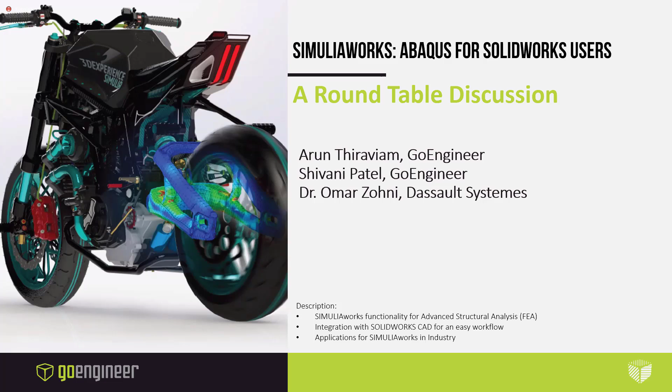Arun, if you could post up that first poll question, I was curious on whether you guys are using any of these simulation tools when you're doing your own testing, or if you have some other methods that you're using when you test your own products. Excellent, very cool. It'd be interesting to hear what other would be for some of you, maybe later, and what products you're currently doing the various testing in. This is really useful information. Thank you for participating. Do you mind posting up the second poll as well?

With 71% of you guys doing finite element analysis, I'm curious on if you're using any of the products I have on my screen.

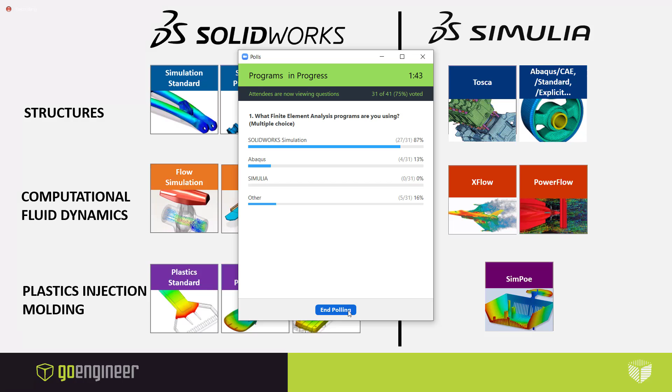So while you were talking, we had a question come in. Is ABAQUS the solver engine behind the SOLIDWORKS FEA simulation tool? It's a good question. So ABAQUS, I can take. Yeah, go ahead. So ABAQUS is not the solver in the SOLIDWORKS desktop program.

It is being developed now by the ABAQUS Solver team. So many years ago, I think this is the order that it happened: SOLIDWORKS acquired Cosmos, which was an old finite element analysis solver out of USC here in Southern California. And then after that acquisition, I believe Dassault then acquired SOLIDWORKS. And I'm not sure, maybe Dassault acquired SOLIDWORKS first and then they acquired Cosmos, but that's basically the solver that's inside of SOLIDWORKS Desktop.

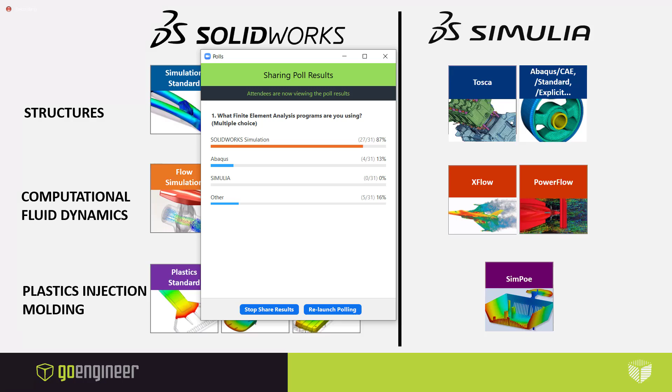That being said, some of the new capabilities that you're seeing, like the way we handle contacts inside of SOLIDWORKS, the topology optimization, those are products developed by Simulia and the ABAQUS team. Actually, the topology stuff is by the Tosca team. So you're getting a good merging of the two solvers right now, but the underlying solver inside of SOLIDWORKS Desktop is still the old Cosmos solver.

Thank you. That's perfect.

I do. We have a lot of SOLIDWORKS simulation users, which makes sense. These are our GoEngineer family. So I'm still seeing your screen, Shivani. I'm not sure if I'm supposed to be seeing something else, but no, I'm not seeing it. Okay, perfect. Yeah, I'm not seeing the polls.

Good stuff. So we got 87% of people using SOLIDWORKS simulation. Pretty wide range. That's a good number for sure. We didn't see any on the Simulia side, which is interesting. Some ABAQUS, some doing other simulation products. That's some good numbers.

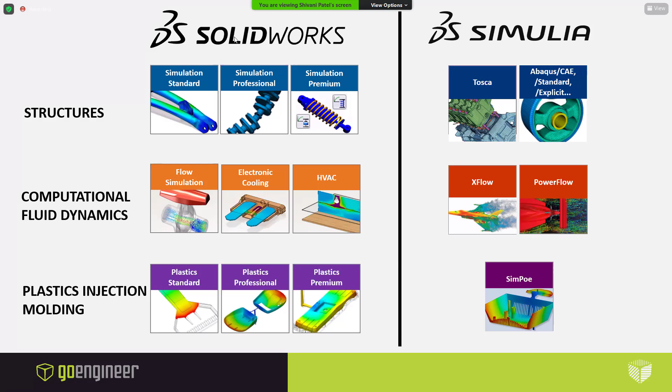Knowing that, what this presentation is really about is the bridge between our SOLIDWORKS simulation tool and the Simulia tool. This is called SIMULIAworks. Again, a brand name covering the bridge between these two products. It is hosted on the 3D Experience platform, and it takes the ease of use, the intuitiveness of many of our SOLIDWORKS products, what really makes it so popular, but then it combines that with the physics and the really industry standard computational power of many of the Simulia applications.

On top of this, it's still part of the SOLIDWORKS workflow, where the big thing about SOLIDWORKS simulation, what makes it so awesome, is you make a little design change in SOLIDWORKS, it immediately is there in simulation, and you rerun your test and you have your answer. It's great for iterative testing, fantastic for those during the design process to be able to run these finite element analyses. So that is still possible with SIMULIAworks.

We were able to push our design changes and our CAD data from SOLIDWORKS into the tool, making it very iterative.

I see something else come in. I saw a question come in. Will Simulia have the explicit solver aspect of ABAQUS? Yes, absolutely. ABAQUS is part of the Simulia brand, so yes, it does have that explicit solver as part of it, and SIMULIAworks does as well. It is using the exact same solver. It is the ABAQUS solver.

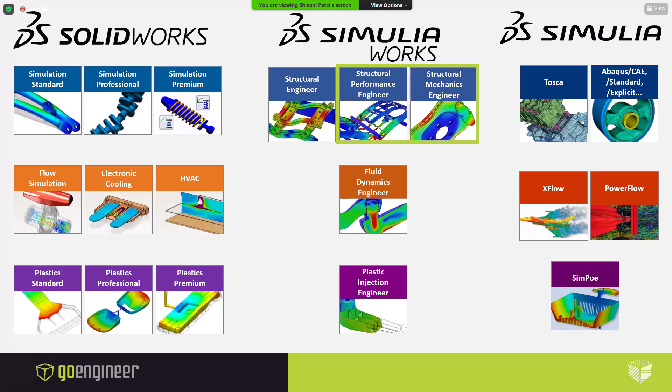Yep. And if you guys are wondering what tabs are, we'll be showing that later. Yeah, we're going to show you guys some tabs.

Okay, I've got about 5 to 7 main technology highlights. I'm not showing the software right now, so this will be very broad. I'm going to give an overview. Trying to get some screens moved around.

Okay, our first main one is general contact. You guys have been using SolidWorks simulation, so you are aware that if I had to apply something like this inside of SolidWorks Sim, I would be selecting each one of these circular holes and applying a no penetration contact, right?

It can be very time consuming. With this general contact method here in SIMULIAworks, it's really just one click. It's one tool that we apply contact for entire part files or entire assemblies. Like I said, really just one or two clicks, so the time savings are fantastic.

But more importantly, we're using ABAQUS's general contact, which is making those component interactions incredibly realistic. Where this part deformed and buckled was very unpredictable, and to be able to accurately represent how this part would react in torsion was fantastic. So that is our first main technology highlight, this general contact ability for parts or assemblies.

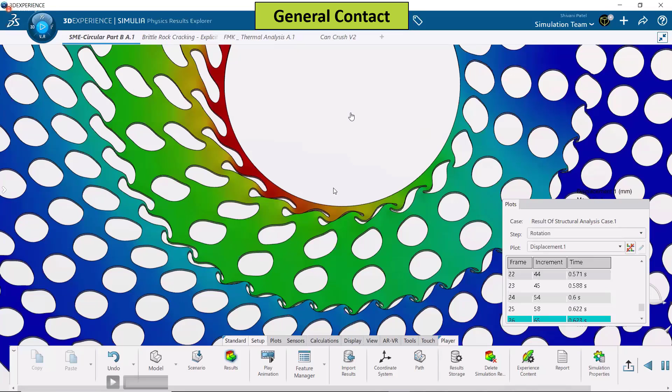Shivani, to draw parallels with SolidWorks simulation, that'll be almost like a global no penetration, right? But way more intelligent. Yeah, because global no penetration, as many of you have dealt with, only works for faces that are initially touching or currently colliding. We would have had to do these individually in contact sets. Very cool point. All right, that's our general contact.

Let's take a look at our next one. It is about complex materials. This example is going to be on a structure colliding with a rock wall. This is like a bump in that rock wall. And watch as I click through these moments in time, you're seeing more and more elements disappear or get deleted.

This is called element deletion. With enough strain, stress, or deformation, it's up to us - these elements will get deleted, and it's a fantastic way to represent something like this where a rock is shattering, to predict how this material is going to react.

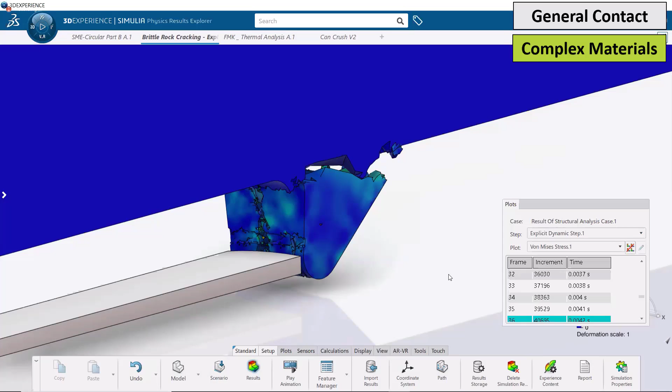Now that's just one complex material, right? And honestly, we aren't able to predict how a rock wall shatters unless we have a material that can handle that. So I'm going to go ahead and show you the larger database that we have available here inside of ABAQUS, or inside of SIMULIAworks.

Let's try to remember, what is the limitation, or how far can SOLIDWORKS simulation go with materials? Off the top of my head, that's about 3 hyperelastic materials, or theories that we can apply. We have elastic plastic materials. We have 1 viscoelastic type.

Here I've selected a hyperelastic material, and just take a look at how many theories are available to us here. The more theories we have, the more accurately we can represent many different kinds of materials. As we know, you don't get an accurate result unless you're applying the correct material to your part file, and all the various other behaviors that material could undergo—things that change with rate or with creep, or that cyclically change. We're able to apply these kinds of complex material behaviors.

Now, saying how important that is, it can be very daunting seeing this list of possible materials and saying, how am I going to apply my SOLIDWORKS stuff in here, or my lab testing material data?

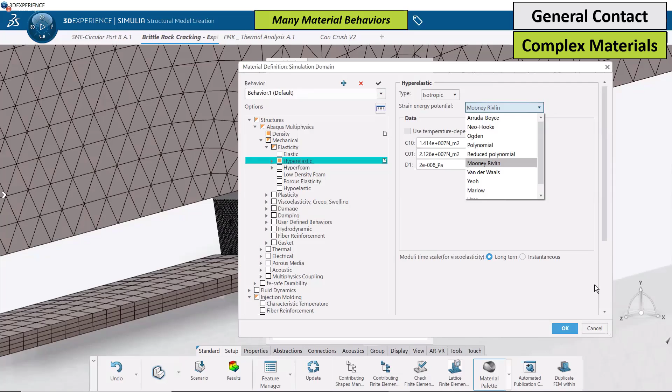So with this material calibration, we're able to very accurately represent our materials and apply them inside that database very easily.

Let me just show a few of the clicks of what that would look like. It's really not that long. It starts with using this particular material application that comes with the program. We import our data—this is Excel data, CSV data, just a few columns inside of Excel. Here you'll see us do some data manipulation, so you can delete data points, you can shift this curve around as needed. You don't have to do a lot of the data modification in Excel; you can make those changes live here.

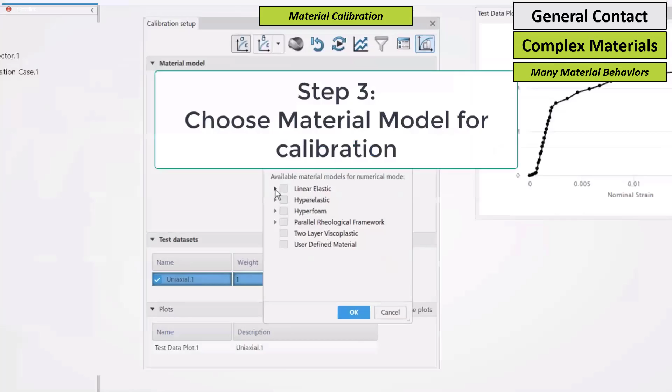Next, we're making a guess on what kind of material property this would follow. We're going to guess elastic plastic first, and that's going to give us some material values here on the left-hand side—elastic modulus, some other stuff there. We've clicked the button called Execute, and it modifies various material properties until we get a curve that matches our data. It's really 3 or 4 clicks, but we're able to get this very accurate material data curve that we can now apply to our part files.

Good stuff, so that's kind of a summary of our material capabilities. What I really like about this, besides the whole host of material properties you can apply, is that you can save this directly into a database without even exiting your simulation session. Once you've done the calibration, you're ready to go—you can essentially plug this curve in and start running your analysis, all within the same efficient application. I like that, just streamlined. Good stuff.

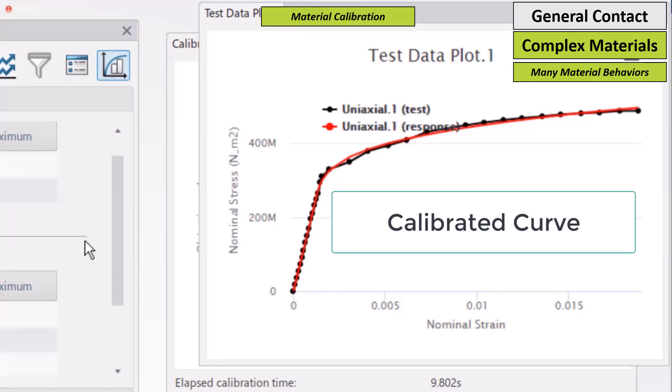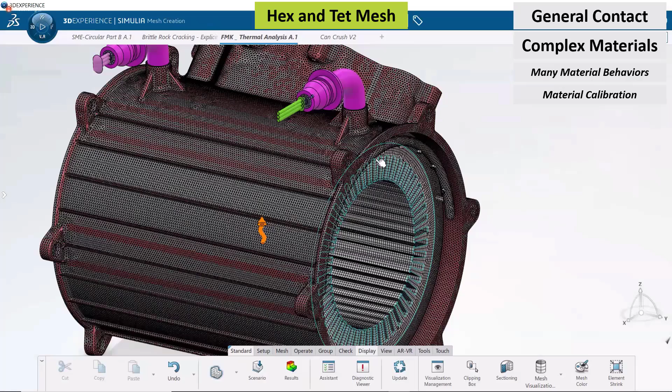Let's get a little bit into meshing, because that's a big thing. What do we have in SOLIDWORKS? We have tetrahedral elements—here I'm going to show you a thermal analysis. Let me pop over to a mesh type; you're going to see hex elements as well, our brick-shaped elements. Check out that part on the inside—those are all cube-looking rectangular prisms, so we have the hex mesh type. We, of course, also have shells and beam type elements.

And then if we take a look on the inside of this model, we can of course refine the mesh. There are some automatic refining capabilities around curves and holes. We can do this boundary type material refinement—check out how the prisms get thinner near the walls of that fluid. This is a flow simulation setup; that fluid is better captured because we're able to automatically refine the mesh around the walls of the part, or the fluid in this case.

You mentioned a key point—I was about to ask, this doesn't look like a structural thermal analysis. Yeah, there's some weird part going through the center of everything. So what kind of analysis is this, CFD or FEA? This is CFD, and you're going to notice some interfaces similar to what Arun's going to show. The meshing capability isn't different from one to the other; it's the same meshing capability, I just happen to have used it in the CFD tool in this case. That looks awesome—it's very nice how the mesh gets a lot finer as it goes towards the wall.

Absolutely, captures a lot of that geometry - boundary layer effects and so on and so forth.

So we had someone ask a question. Omar, I'm going to direct this one at you. Besides just meshing it here in this program, can we import meshes from regular ABAQUS or Simulia or other programs and bring it into this tool?

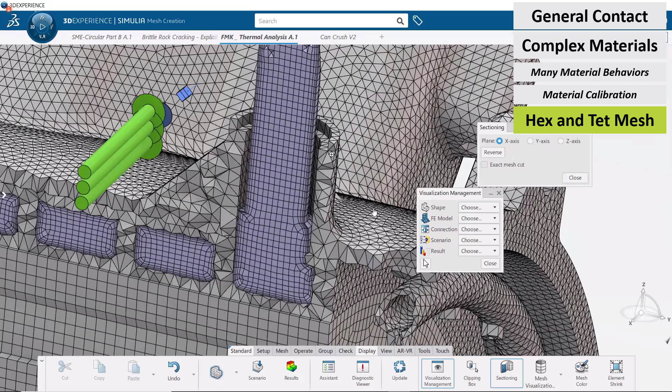So we've got explicit dynamics - this is the explicit solver. This could be dynamic capabilities or crash testing. Let's go take a look at that. We've got some crash testing or drop testing - this is impact testing, really anything happening on a small scale of time.

Yeah, any of those extreme kind of buckling or crumpling scenarios where a general nonlinear solver, an implicit nonlinear solver, wouldn't be able to capture this small range of time or the material behaviors that happen over those microscales. So with the explicit dynamics tool, we're able to go much further beyond the deformation scales available in SOLIDWORKS into these very complex realms.

Jonathan asked, which solver would I need to perform a crash test involving a fluid-filled shell? With a crash test, we would definitely need the explicit dynamics tool. The level of crumpling and buckling going on there, and that interaction between the two parts, would require that explicit tool. I'll show an example of this.

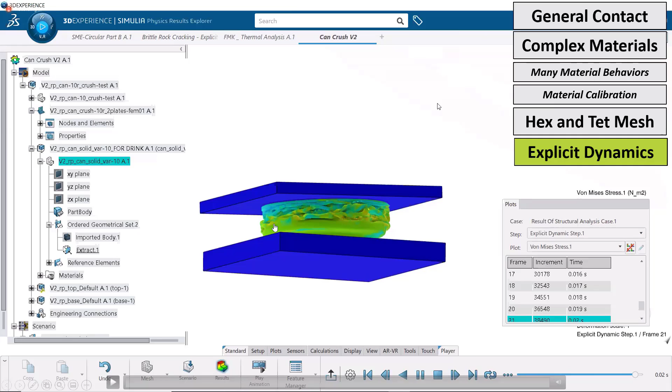Okay, good. So a huge range of functionality there. With the ability to run these complex analyses, you might be thinking, how long did that take to solve? That looks really complex. Fortunately, the can was very simple, and this took maybe 15 minutes. But if it was a very complex solution, I could be worried about that.

Fortunately, we have the ability to run things locally on our computers, but also on the cloud, using cloud computers. With the program, you can run it on 4 cores on your local computer, but with a little bit of an extra purchase, you can get access to tokens or credits like I have here to use those cloud-based cores.

Now, this is an explicit solver, meaning the more cores that we are applying to this solution, the faster it solves with no diminishing returns. So you can get huge time savings running with these cloud cores.

Omar, do you have any comments on that? No, I mean, I think you highlighted it great.

So the way it works is if you purchase cloud, out of the box you can run on 4 cores, although that's going to be increased to 8, I believe, later this year or early next year, so you'll be able to run 8 cores locally. If you have cloud computing credits and a small model, less than 1 million nodes, it will run on 18 cores; 1 million to 4 million nodes, 36 cores; and over 4 million nodes, it'll run on 144 cores in a virtual machine.

There's a little bit of time it takes to set up the virtual machine, but like Shivani pointed out, your return based on the runtime should be very, very linear. So if it took 16 hours on 1 core, it will take 1 hour on 16 cores. I love it, great numbers.

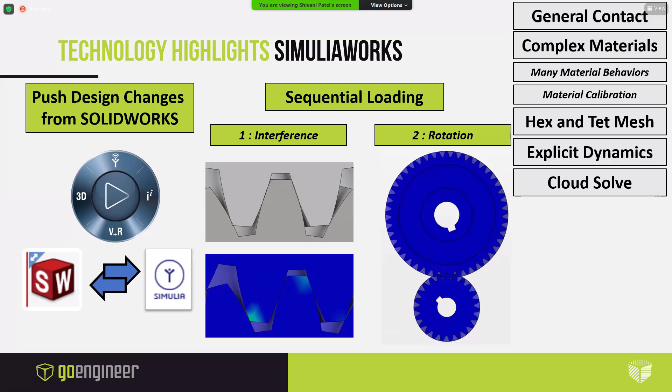I did, we had a question come in: is there a different license to run on more than 8 cores locally? It's not really a license, you just have to buy cloud computing credits. It's the same interface. Yes, exactly.

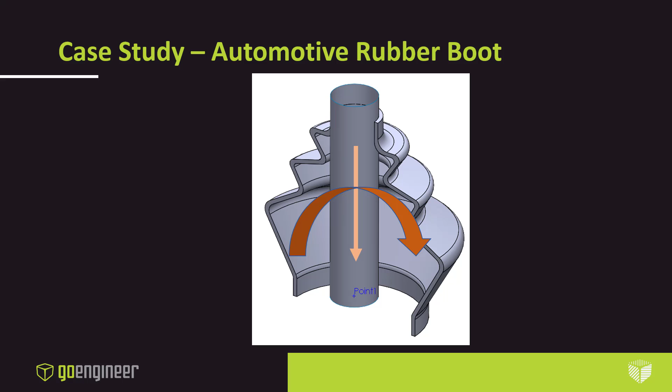So I have this automotive rubber boot—you find these in CV joints of automobiles. It's a rubber component that experiences a lot of stress and strain because it's on rotating components mostly. I thought it would be an interesting case to simulate with SIMULIAworks because I'm able to essentially stack loading conditions: compress this component, and also apply a torsional load that follows the compression, which is pretty easy to set up in terms of workflow, and it gives you some really cool looking results.

For starters, you essentially start off with SolidWorks. You maintain the connection with the 3D Experience platform through the 3D Experience connector. As soon as you open a model in SolidWorks, it shows up on the connector, and all you need to do is save it. When you hit the save button, there are two copies that are essentially saved, one on your local folder for you to make manipulations, and another on the cloud on the 3D Experience platform.

Now, you'll essentially be setting up the simulation on the cloud version of this component. As soon as the save is complete and the software converts it into a format that the 3D Experience can read, you're able to launch a simulation application right from within SolidWorks.

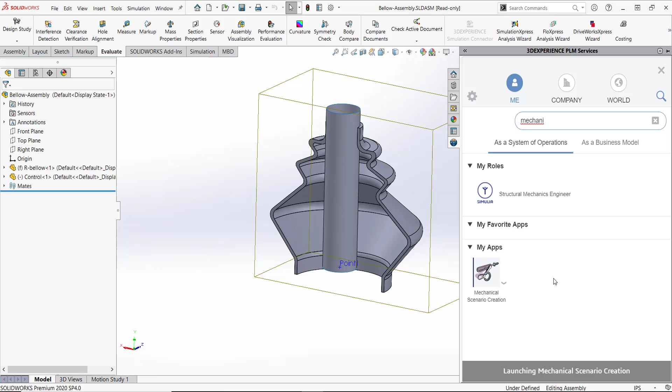So like Shivani said before, there are two applications. The mechanical scenario application is ABAQUS explicit. You'll just know that it has explicit and ABAQUS standard capabilities. So we have two levels: ABAQUS standard and explicit. Mechanical scenario is explicit.

Now you'll notice that I've launched another application, and the models automatically open into this application, and I'll be primarily running a structural analysis. So I select the structural analysis type, and boom, you're in the simulation environment. And just know this model is still connected to the SolidWorks model. So what I'll be showcasing is I'll be making a change and pushing that change through the simulation environment.

Now jumping into the simulation environment, I just want to show you the SolidWorks connector, and this is the model open in the simulation environment. And immediately you'll see the UI. It might seem a little familiar—you have the spec tree, as we like to call it, which is similar to the feature tree in SolidWorks.

And if many of you have used the simulation wizard in SolidWorks, we have something called the assistant panel, which is very similar to the simulation wizard. So essentially you follow the simulation wizard to set up your analysis and make sure that all of these stages are assigned. Simulations can sometimes get complex, especially if you're running crash testing for complex materials, and this is a really handy way of keeping track of the analysis setup.

Now, this taught me the interface, actually, the assistant. Yep, that's where I learned where everything was, and then I got crazier after that. But this was my teacher.

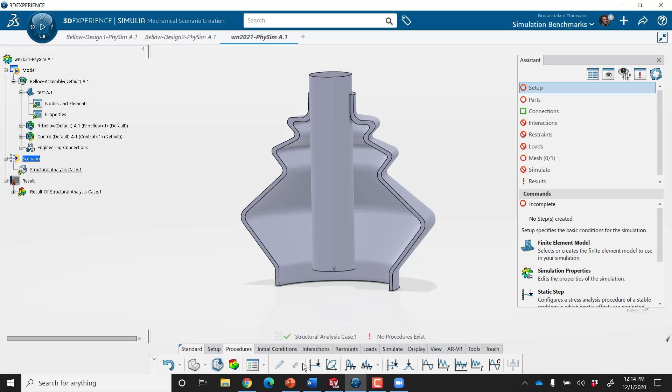And when it comes to the setup, you have access to all the procedures, all the analysis types right here. So essentially, you see the red circle in the setup indicating that you haven't specified what kind of analysis you're trying to run. You can essentially interact with the action bar to set up the various analysis types.

So if I wanted to set up a nonlinear analysis, I can just grab the static step, give this a name, and specify the appropriate time step settings, and keep moving forward. As soon as I complete that, you'll notice there's a green check mark in the setup, so it gives you a lot of feedback. I'd also say I basically use the assistant panel to teach myself the software, and it's helped me be very successful with it.

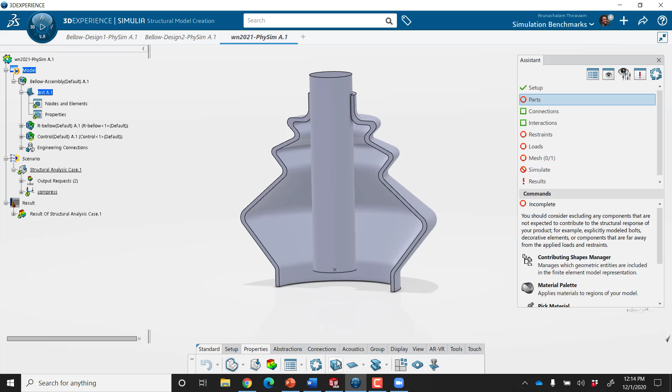But what I'd really like to show you is the meshing aspect of this entire thing. For the next stage of the setup, I'm able to assign section properties to each of these components. This answers the question we had earlier about whether mixed meshing is possible—and yes, it is. You have access to all the section types right here based on what kind of model you have. So here, this is a solid bellow, but the control arm is essentially a shell, so I'll be applying different section properties to each of these.

So I'll go in and select the component, and I'm able to assign the material directly here. Once I hit the magnifying glass, I have access to the material database, and I'm able to search it. I'm trying to apply a silicone 60 material that I already had keyed in, so it shows up right off the bat. But if I clear the search, you'll see my entire database. This was a custom material I created using the material calibration app—I had the material testing curves that I was able to convert to coefficients.

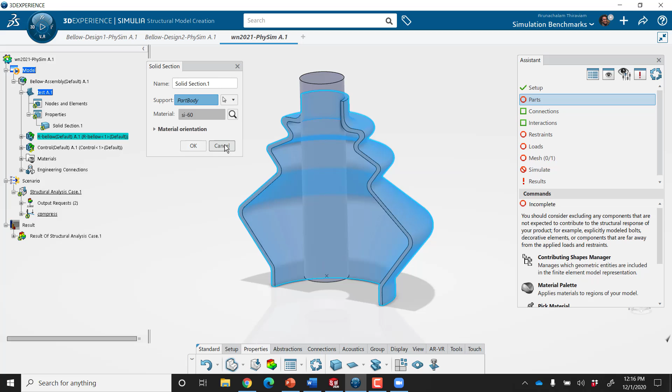Now once the solid section's been assigned, I'd like to show you the spec tree for a second. Just like SolidWorks, anything you do to the analysis in terms of setup essentially shows up as a history in the SolidWorks model and in the spec tree. So once I set up the solid section property, you can see it shows up as an item on the tree. If I want to modify it, I can just double click it and have access to it. That way you have multiple levels of feedback to make sure you're setting the analysis correctly as you set up these analyses.

Now I did mention I'm able to apply shell section properties to the control arm, so I'd like to show you that really quick. I just grab the section property, select the component, and specify the thickness. You can manipulate whether this is the mid surface, the top surface, or the bottom surface, giving a lot of flexibility. I won't assign the material here because I'd like to show you the feedback mechanism in the software—it's pretty great.

You'll see there's a yellow exclamation mark next to the shell section indicating that you've assigned the section, but you probably missed out the property. That's fine, I'm just demonstrating the workflow, so I'm going to move on.

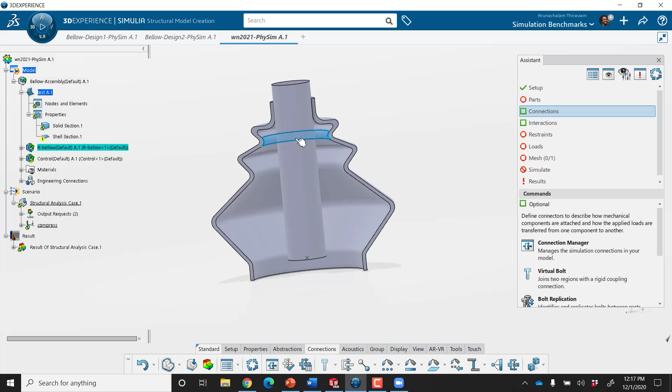Another really nice aspect of the software is that it keeps track of your geometry for your boundary condition and connection applications. This is especially beneficial when defining tie or bonded contacts. You can specify the surfaces that are bonded together, typically the bellow surface and the control arm, or use the tie detection tool to find all the touching faces, or specify a clearance between faces to identify them as bonded contacts.

You have a list of all the ties that have been recognized for you to pick and choose from - this big tie buffet. I think that's a really cool feature, especially if you're dealing with a 20-30 component model where most of them are bonded or welded together. It's a handy feature to specify either contacting components or clearance between components meant to be tied together.

Before you get too much further, we had a question come in. Will many of these ABAQUS capabilities get imported or incorporated into SOLIDWORKS simulation, like the material calibrator?

This is interesting, I see Omar unmuting himself, I'll comment right before he does. They combined the R&D teams between ABAQUS and SOLIDWORKS simulation, so we're already seeing capabilities come in. If you check out our What's New videos from the past 1 or 2 years, the physics improving inside SOLIDWORKS simulation is all coming from ABAQUS. But Omar, any more specifics you wanted to add?

Yeah, I was going to say the same thing. There's been a collaboration between the development efforts on the desktop and the ABAQUS side - it's all being developed by the Simulia development team. I'd probably say you're not going to see the material calibration app or the explicit solver ever turned on in the desktop. The 3D Experience platform and the roles and apps available there are the future for DS. That's not to say you won't continue to see development, bug fixes, and streamlining to the desktop SOLIDWORKS simulation tools, but probably the new stuff will remain on the platform.

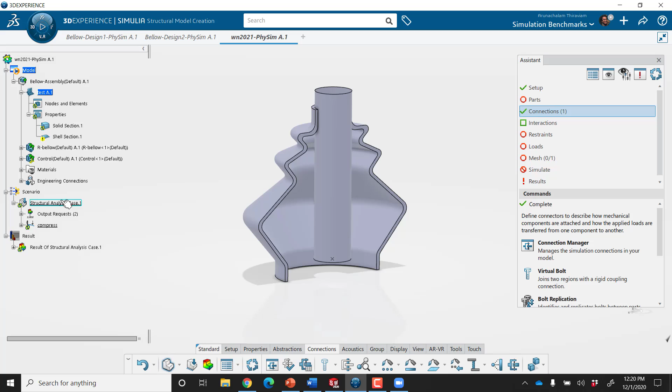So where was I? Oh yeah, okay, we were talking about the tie contacts. I really love pointing out this tree because having such a complex analysis software give you feedback on all the complexities you've dialed in is a super nice aspect. You see the tie contact here again - if you want more detail, get in and look at all the faces that have been defined, make sure you define how the source and target surfaces interact, and so on.

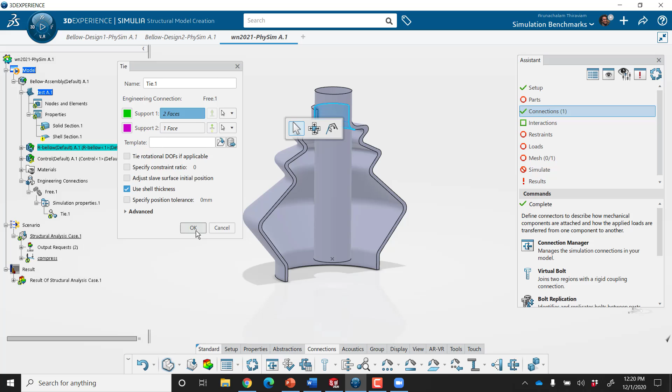The next aspect is the mesh - I'm going to jump through all of this. Actually, I'll show you one more thing, the restraints application, again to emphasize that all of this is applied to the face of the component. So any change you make to the component is going to update the component here, and update all the boundary conditions applied, which gets mapped onto the mesh.

That's a really big advantage of being able to apply these boundary conditions directly onto the geometry. So you can imagine this is probably going to be clamped down, so I'm going to select that face.

Again, feedback - you have a big exclamation mark here. It just means that it's missing the mesh. Essentially, that will be corrected as soon as I apply the mesh.

Okay, the mesher. As Shivani pointed out earlier, we have various meshing types that help you dial in different degrees of complexity in terms of how you capture your model.

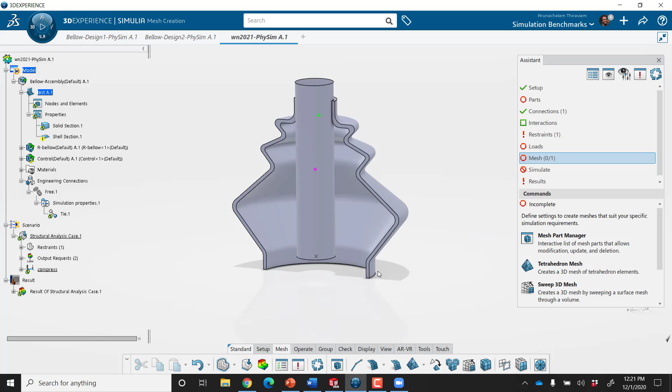Anytime you have this kind of swept or extruded geometry, the sweep mesher is a no-brainer. It applies really high-quality hex elements to solid models. For instance, this is a revolve component. As soon as I select it, the sweep mesher identifies the revolution direction and the start and end face. I'm able to specify the element quality and dial in the mesh size.

I can get the software to either guess the mesh size, or I can dial it in myself. Because I've run this model a couple of times, I know what the ideal size is. I'm also able to put in the number of layers of hex that will be employed as this thing is being swept through.

As soon as I hit the mesh button, there it is. You can see the model has intelligently recognized the start and end face, and it's discretized that face along the sweep direction. You can do this for various kinds of swept models - it doesn't have to be perfectly extruded or perfectly revolved. As long as the start and end faces are similar, you should be able to use the hex mesher.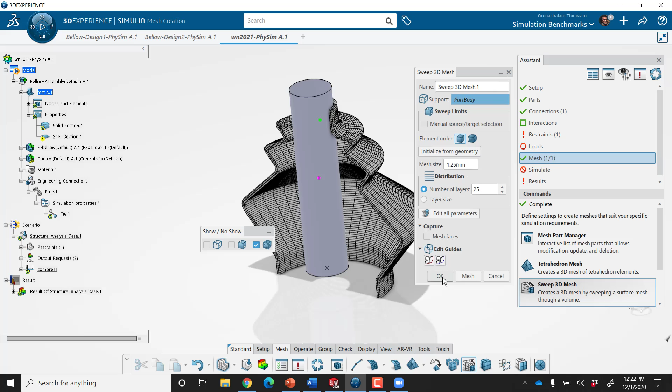There's one more aspect I'll show you, which is the check elements tool. Anytime you get into crash-type analyses or large deformation analyses, you want to make sure you don't have any element collapse and so on. This quality analysis tool is really handy - as soon as you grab it, you see all the green elements that are good, the yellow elements that are bad, and the red elements that are really bad.

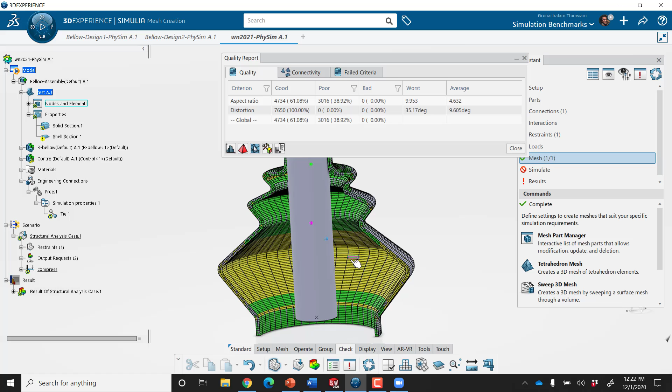I don't have any really bad elements here, but I noticed some yellow elements indicating these hexes might be out of aspect ratio. So I can fix that - going back to, well, I'm pretty sure if you guys were guessing, you guessed it, the spec tree. I'll double click the sweep mesh on the spec tree and increase the number of layers from 25 to 50, increasing the discretization in the swept direction. Now you have a nice little mesh.

Then I can go back to the check and justify that, hey, I've made a change and it's positively affected my model in terms of the aspect ratio of the mesh. I'm going to save this, and I'm pretty sure you guys get it by now.

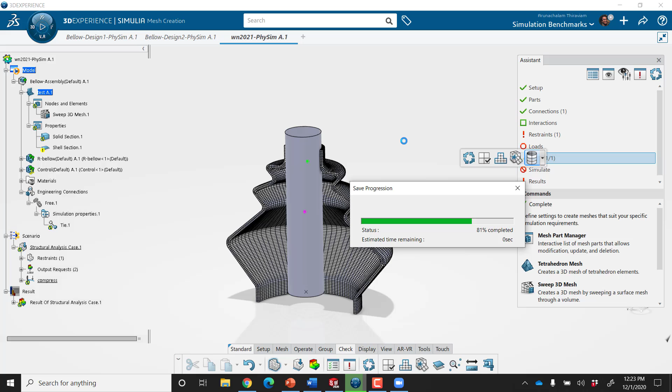After this, there's just a couple of steps where I apply the boundary condition to this control arm to pull the bellow down and essentially deflect it. So I'm going to jump into another tab that Shivani and I have been constantly referring to during this presentation to show you some results.

So while I access these results, do we have any questions?

Where are they stored? It looks like you're downloading them. Why don't you talk about that?

Oh perfect, yeah. So there are two modes of storage. Of course, the model is stored in the cloud. But as far as the results go, you have two options. If you're dealing with really large results and iterating through multiple designs, you have the option to store the results locally on your hard disk. But by default, the results are stored on the cloud, so it's a common space shared by everybody, by all the designated users in your organization, and you're able to use that common space to dictate who gets to view the results and who doesn't.

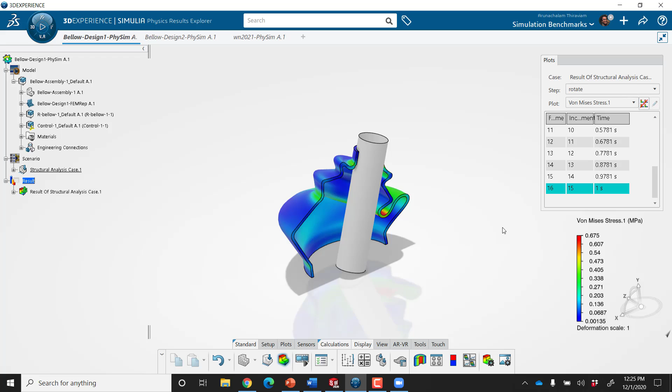Omar, do you mind commenting on the cloud storage itself, on what kind of servers we're using? Yeah, so we're using a mix of different servers. The data is stored in the cloud. There's some information online about the cloud security that DS is using. Obviously, it's a very secure cloud. Our architecture is very secure. If you're in the US, it's going to be stored on the West Coast, there's a server in LA or San Francisco, one in California. If you're on the East Coast, there's one back in Boston. So the data is stored on the cloud, you can download it locally and have it available locally, but it meets all the requirements related to cloud security. We can share the link for you guys to download the white paper about cloud security if you're interested. I apologize, I think I got cut off. I came back on, so I don't know if I missed anything. Oh no, you're good. Okay, awesome, let me just show you guys the results really quick.

This is the sequential loading that we keep talking about, where I have access to the two steps here. That's the end of the first step. And when I switch to rotate, that's the beginning of the next step, just starting from the previous step. I'm able to apply the torsional, or the angular loading condition, after the first step.

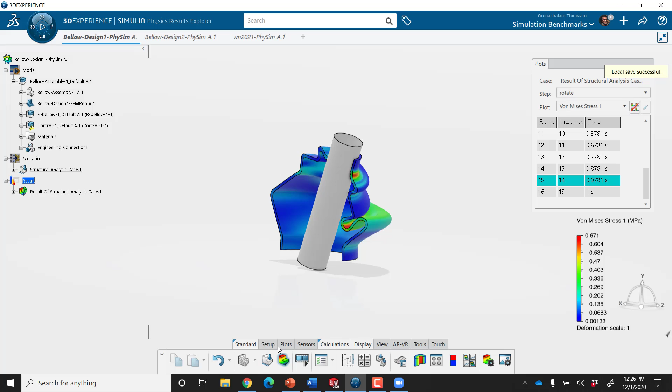As far as post-processing goes, you have all the usual options. You can turn on symmetry plots, isoclipping, section plots, and so on and so forth. But there's one thing I'd like to highlight in the analysis setup, actually there are a couple of things I'd like to highlight.

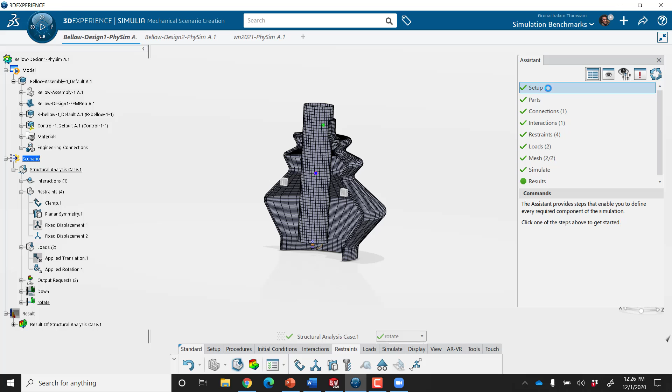The first thing I'd like to highlight is the way these multi-step loading conditions are managed. You'll notice that I'm able to switch between the two steps that I've created. As soon as I grab the down step, this applied translation goes on that essentially pushes this down. Once I switch to the rotate, this applied rotation goes on that then rotates the model. But there's another handy tool you can use to manage this, which is the feature manager. Once I go into the feature manager, you can see that all my steps are laid out, and I'm able to turn on and turn off each of these boundary conditions in each step. So if I have a 3 or 4-step loading and my feature tree is just packed with loading conditions, you'll be able to use the feature manager to dial in what comes on and what turns off during the loading process.

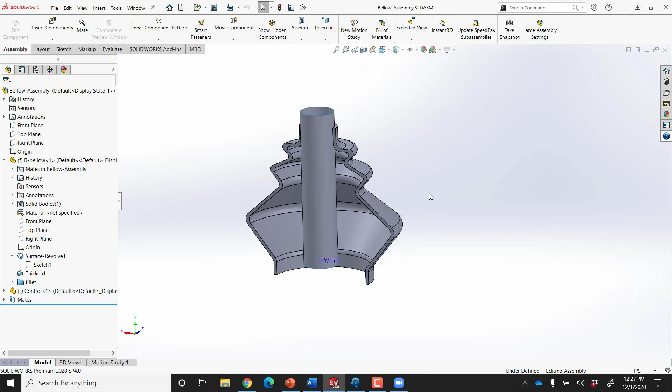With that, let me jump back into SolidWorks and show you guys the change I'm going to make to the model. I've noticed that the bellow was essentially buckling in this section, so I'm going to try and change the model so that this section becomes thinner, it becomes shorter than it is. For that, I've got to remember to reserve the component, because since you're operating in a common environment, you want to make sure you have access to it and nobody's making changes while you're working on it. The next thing I'm going to do is in-context edit the sketch that drives the shape of the component. I'm going to make a couple of changes, and I might jump back into the presentation for reference, but let's see.

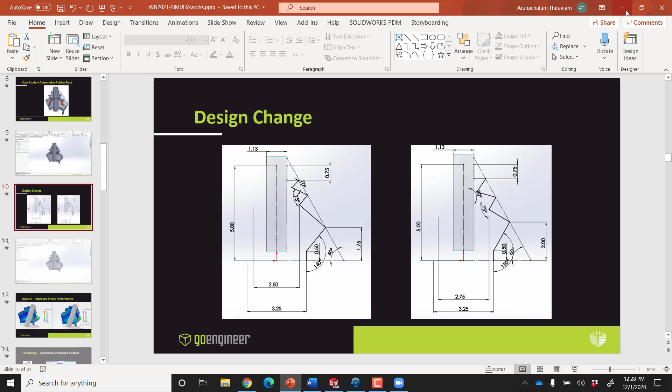My ultimate goal is to try and make that section as short as I can make it. Yep, I think those properties are correct. Let me jump back to the presentation to make sure. 2.75, 150, and 2, yep. Just make that 2.75, 150, and 2. Perfect. Now that I've made the change in SolidWorks, I'm going to exit.

You can see that the model's changed. Now I'm going to go into my panel, and it's going to indicate that, hey, there's a difference between the SolidWorks version and the version in the simulation environment. So I'm going to quickly upload this by just hitting the save button.

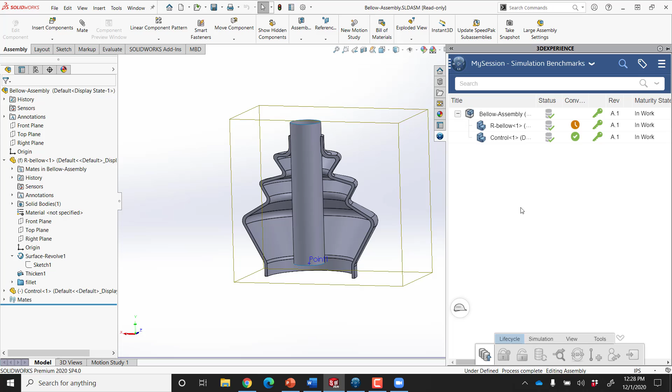So this is looking like a PDM thing, obviously, right? A data management type tool. Yep, absolutely. Something I wanted to mention is this is with the 3D Experience platform. As part of getting access to the 3D Experience platform, you're getting access to this kind of PLM interface. Again, the philosophy behind the 3D Experience platform is to make sure all of you are able to work in a collaborative environment on design and analysis, and you want to make sure you aren't fighting on your model. So there's definitely an undertone of PDM technology essentially driving to make sure you're successful in that. Yeah, that's a great point, Shivani.

Can you explain what I'm about to do right now? Well, you should have watched my searching video on our 3D Experience tutorials page. But what Arun is doing is using keywords like 'sim' to filter all of his files for simulation files specifically. That search bar is generally like a Google search bar, searching all the data available on our shared cloud database. He was able to find the file pretty quickly by doing a filtered search. Just like that, I have about 251 simulation files already, which I just found using a couple of keywords.

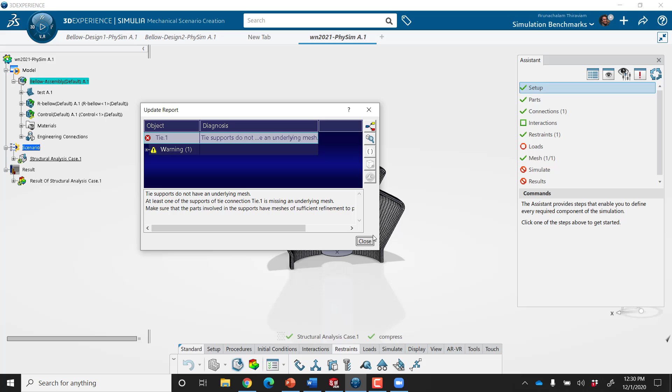You'll notice the mesh still remains the same as my older model, but the model has essentially changed. I can quickly enforce this change by hitting the update button, and the software should update the mesh to match the model. You can imagine working this in a 25-30 component assembly - it just makes your analysis process a lot easier. That was to show you a little bit of the SolidWorks connectivity.

I'll just show you the final design of the bellow, so you guys can see how different it looks. Well, too late now. But can you answer, are there rigid parts available? I was going to have you show the button, but yeah - so yep, absolutely, there are rigid parts available.

The nice thing about rigid parts is you're able to specify a control point, so you're able to get key pieces of data like forces, and you're able to use that control point to essentially manipulate and move the model. In this example, this control arm was meshed as a rigid part, so that's why in the results you don't see any stresses. You basically see just a white control arm, which is the application default.

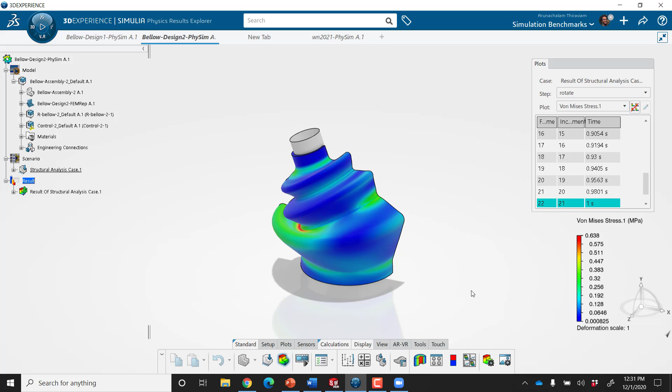Do you have another question? The control points is a very interesting thing - that's something SOLIDWORKS simulation doesn't have, right? We can make a rigid part, but we don't have that control over it that a control point could have. Right, or we're driving it based on the center of mass or based on a point on a face. Right, absolutely. We had another question come in the chat, but it's quite long.

Perhaps I'll copy this into a slide. How about that? Perfect, yeah, we can save this for the end. Guys, I have results for both components, and I'd just like to show you one more piece of interface eye candy before I hand it off to Omar.

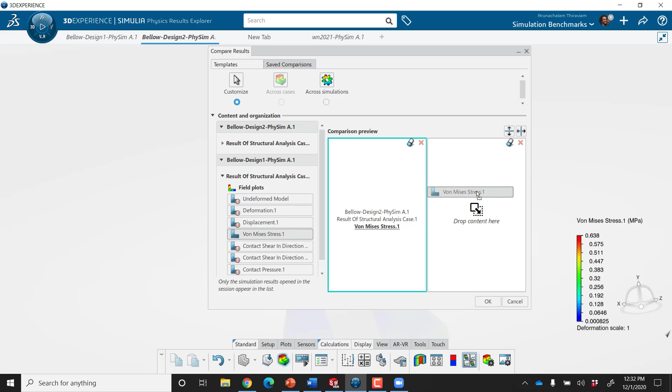If you have multiple tabs open, if you've iterated through multiple designs, I can grab this compare results button and basically grab any simulation result from my current session. For instance, I have the Bellow Design 2 von Mises results loaded in. I'm just going to drag in the Bellow Design 1 von Mises stress, say OK, and I have access to both of these results essentially synchronized - I'm immediately able to see how my design change affected the stress result.

I probably didn't get too far with this section. This is probably still going to be a problem, considering that I have concentrated stresses instead of something nice and spread out. But I think I did attempt to correct one area, so I personally consider that as a win.

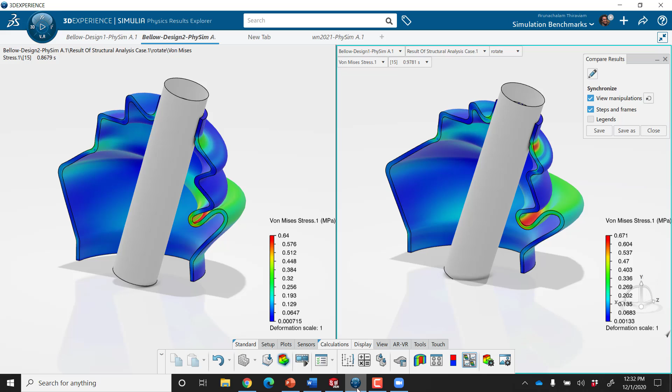But can pre-processing to generate nodal loadings or surface pressures be brought in either by a spreadsheet or some kind of external data import for multiple load cases? Let's say like importing results from a CFD analysis into the FEA analysis.

Yeah, so that's a great question. I'm unmuted - okay, perfect. So there is a way to import load data based on spatial data. I actually haven't tried it yet, but it is available in the loading. I believe that it's available, I think you'd be able to, and I don't think the nodes even have to line up - I think it does some 3D mapping for you to import that data. But that's one I would need to double check on. I'm almost 100% sure that it's available in SIMULIAworks.

But like I said, I haven't tried it. I thought I played with the pressure loading or force loading before, and one of the options was to bring it in via an input or spatial data. And you're really referencing any general program being able to import that kind of FEA data.

I believe the Fluid Dynamics app can push results to the FEA app, right, on SIMULIAworks? There is a method to do that, yeah. So there's definitely an approach to do that if you're using the Fluid Dynamics Engineer on the platform and then pushing it to one of the structural tools on the platform.

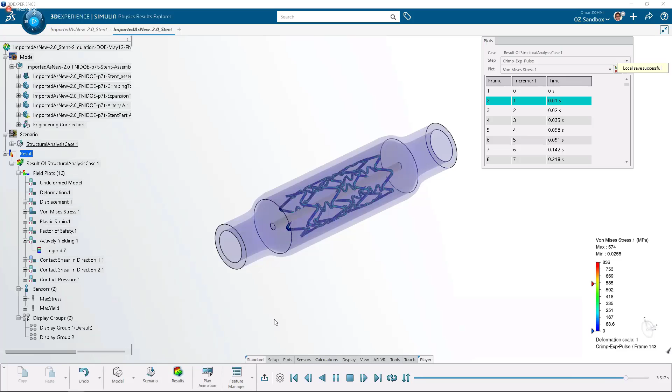Sure, I think Shivani highlighted it earlier. The way ABAQUS approaches contact or interactions between bodies is very different than the way SOLIDWORKS simulation or ANSYS Workbench does it. To be frank, the assumption inside SIMULIAworks is that any faces, whether touching or not, can come into or out of contact. It's a no penetration contact.

Now, I think Arun, you showed a tying feature. So if you want all the faces that are touching to be tied together or bonded, like in SOLIDWORKS simulation or the way ANSYS would approach it, you have the ability to do that. But the default general contact used in these tools is a no penetration contact, and faces don't have to be touching—they can be out of contact.

I'll show a couple examples. The example Shivani showed of that honeycomb structure twisting is a perfect example of faces that weren't in contact initially but end up in contact. You have the full range—the ability to specify the friction coefficient, and you can resolve interference if that's important to you. So you've got access to all those capabilities, but really with just a push of a button. There's not much you need to do to turn on general contact.

So I'm going to walk you guys through a couple examples. I'm going to focus on consumer packaging and high tech—those are just two industries we've had a lot of interest in with these tools. The reason I'm showing this is we've actually had a couple consumer packaging and bottling companies come to us and ask how we would approach some of their use cases.

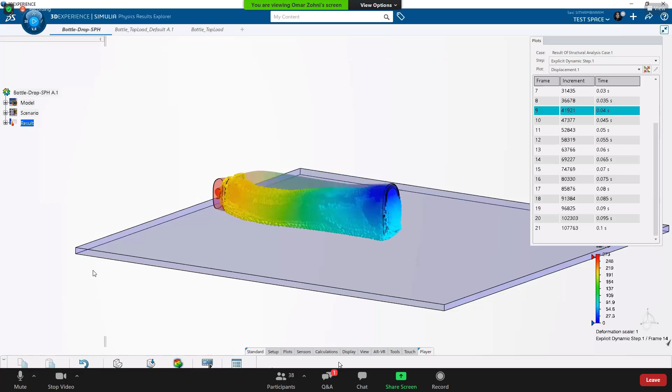Here is a drop test of that same consumer product, using that SPH approach I talked about earlier. Those dots in the center of the bottle are actually modeled as a solid, and then you kind of particleize it using smooth particle hydrodynamics, the SPH elements. We can get a feel for exactly how they move, and you can also see some of the permanent deformation here on the bottom as a result of that drop.

Let's take a look at—I think the value comes across, right? You can quickly validate your designs, and you can test alternatives using the approach that Arun just showed.

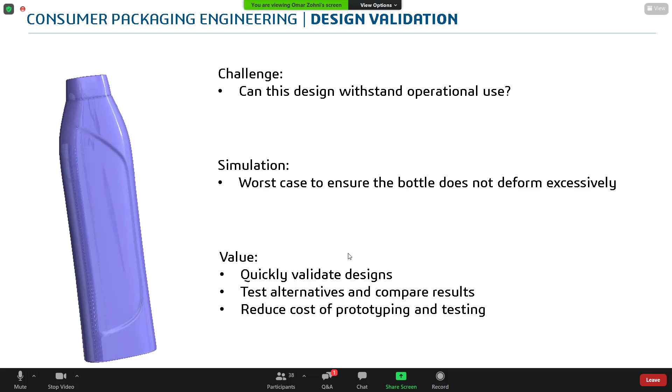When I first saw those SPH elements—sorry for interrupting—my background's in aerospace, and this was recently after that plane ran through the flock of birds and the engine broke down. I've seen these SPH elements used to represent a bird, actually, or it doesn't have to be fluid. It could be something like meat, and you want to see it break apart. Yeah, anything that you've got material properties for the way it's going to break apart.

I'll show you guys an example where we actually do a bird strike—it's one of the videos I'll show at the end. But yeah, that's another common place where SPH is used. I've seen it used to model sand too. When I worked at ANSYS, we did a lot of work with golf club companies—they would often model their sand traps to see how a ball was going to emerge, and the sand would be modeled as SPH.

We had an SPH question come in—sorry to keep interrupting—is it similar to the lattice-Boltzmann method? It's similar, although it's not the same. It's a different approach. The lattice-Boltzmann method is typically used in fluid dynamics, whereas SPH is typically used in structural analysis where you're trying to mimic fluid behavior.

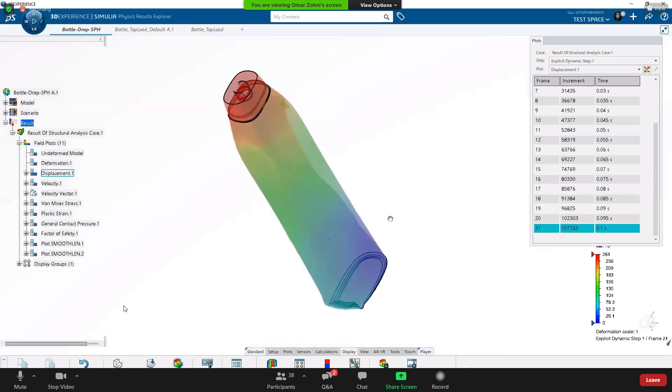That drop simulation, the plastic bottle crushing where it was dropped and the SPH elements were scattering - this solved within 2 hours. Now I'm using the cloud, although it's a small model, so I'm using 18 cores on the cloud. It solved in 2 hours. If you were running it on 8 cores, it might take a little bit more than 4 hours to solve. It's not bad, especially considering all the interaction between the particles themselves.

Yeah, absolutely. And that's an example where someone talked about mixtures - in this case, the bottle is modeled as shells. The top and bottom are modeled as rigid elements, and then you have the SPH, which is modeled as a solid TET, but then it's turned into those particles.

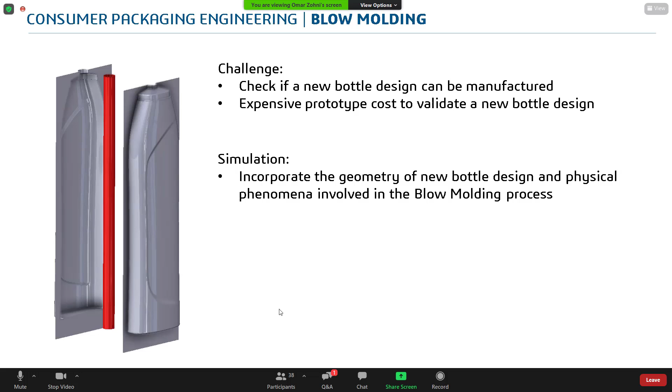So another not too common thought of simulation that you can actually achieve is blow molding. This was an example or a model that we ran for that bottling company who wanted to see how we would approach this. We can very quickly and easily model blow molding or thermoforming types of events to get a feel for what the final shape is going to be, how much pressure is going to be required. And this is another one of those that takes sequential loading, right?

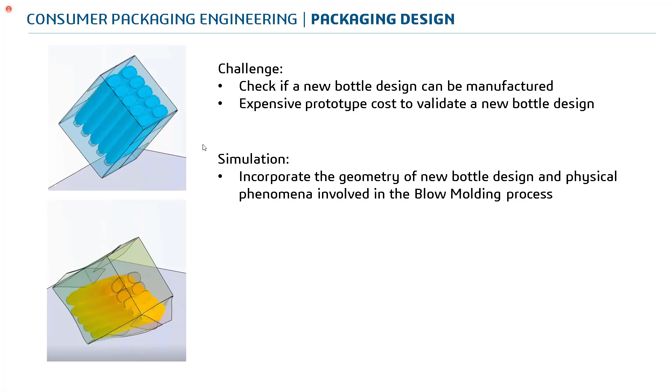So let's see, here's another really interesting one - doing drop testing of a packaged group of products. In this case, we can quickly put together all of those bottles, put them in a box, and then see what happens if we drop that box. See the interaction between the components. I mean, you just wouldn't be able to do this with SOLIDWORKS simulation, right?

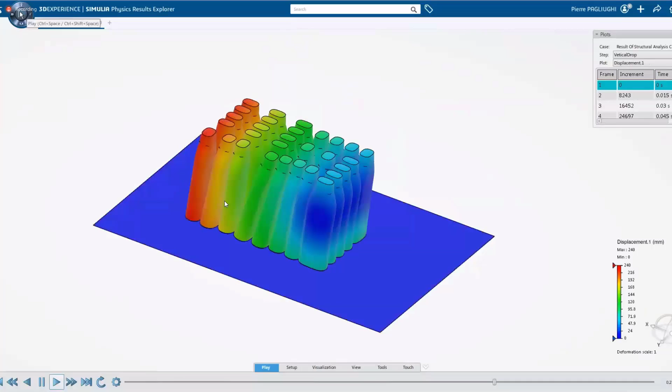And I'm sure that everyone has ordered something from Amazon that has come damaged. So this is a very relevant type of analysis. I know that since everybody's just ordering from Amazon now, since we can't leave our houses, whether it's shampoo or almost anything else - it's like you planned this example from Coke bottles to packages.

So I don't want to talk a lot about it, but we did talk a lot about the collaborative aspects of the platform too, and I just want to hit on it for 5 seconds. One of the really nice things about the 3D Experience platform is the ability that it gives you to collaborate with people that work in different organizations and different geographical locations.

And I'll be the first to admit, I think the SOLIDWORKS brand was a little bit resistant to the 3D Experience for a little bit too long. And what we've really seen this year with COVID-19 and everybody working from home is that it really, really provides a business benefit. It allows you to do a lot of your work in the 3D Experience platform and collaborate with different functions, whether it's marketing or sales or R&D or technical support. It's been really eye-opening in the last handful of months to see what we can do with it.

It reminds me of interfaces that are like social media, that we're commonly using, maybe like Facebook or something like that. It feels like that - that's why it's easy to kind of comment and talk to your coworkers.

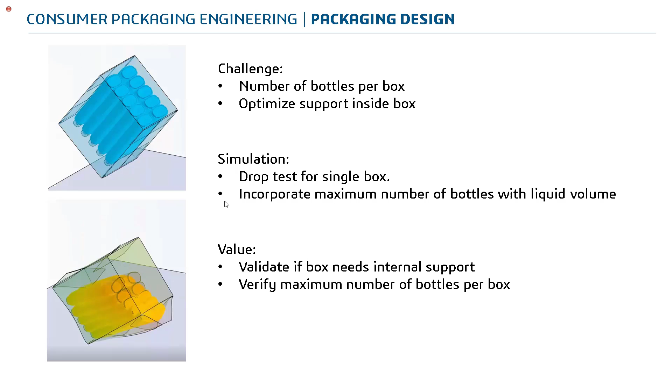Yeah, absolutely. So a couple other examples - ISTA, I think it's short for the International Safe Transit Association. It basically has to do with a set of requirements, like mil specs in the military realm, that dictate the types of tests you should subject your consumer packages to, to ensure that they're going to withstand shipping.

And we're able to basically do all of those tests - whether it's drop testing, transportation vibration, a random vibration curve or a shock response spectrum, stacking load. We're really able to hit a lot of those ISTA test categories, and that really minimizes the amount of time and money that you have to spend doing physical testing or doing real testing.

So I don't know if anybody's had the opportunity to work with a shaker table, but it takes a lot to set up and instrument a shaker table and then extract the results. So if you're doing harmonic testing or random vibration testing, a lot of times we can really eliminate a lot of the need for some of those physical tests.

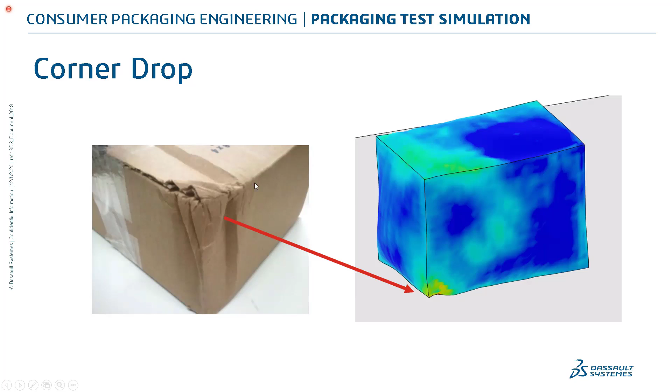A really nice example of a corner drop test. This is a company we worked for that had some really specific material properties for their cardboard and exactly what was going to be inside. We were able to really hit the nail on the head with respect to what the deformed shape was going to look like when it was dropped on the corner.

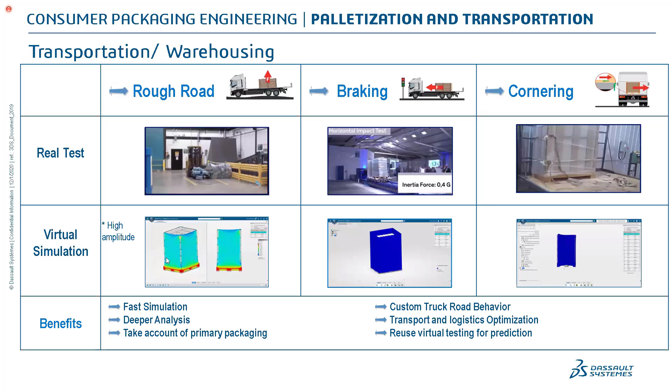Let's see. Yeah, so this is really cool, being able to see side by side these types of tests.

So when you're going, you can see the vehicle is going over kind of a bumpy road. Down here you can see there are some bumps. We mimic that inside of our inputs inside of the SIMULIAworks tools, and we can really get a good feel for what's going to happen. This would give you an idea of whether or not you need to add more plastic or wrapping around these to ensure that when it does fall over, everything doesn't break apart, or maybe potentially add more stabilization to ensure that when it does go over those roads, they're not going to fall over.

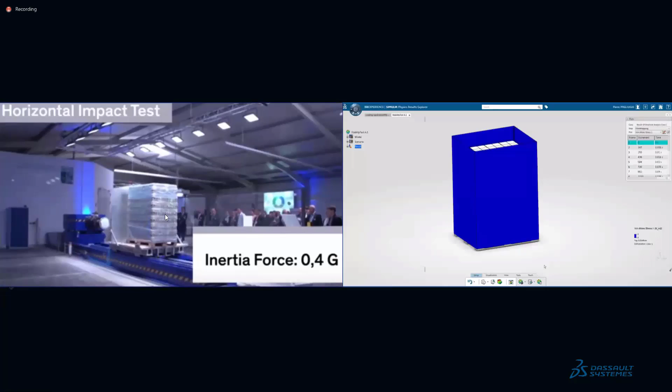Another example of a G-force test. You can see we're shrink wrapping that and then running it into a wall.

Let's see, yeah, I think this is a shock response, or just kind of some G loading. The way your increments are spaced out, it seems like it's an explicit analysis. Yeah, maybe you're right. Based on the increment size, you're right, it is an explicit analysis. Good call. So you're just applying some G loading in the horizontal direction.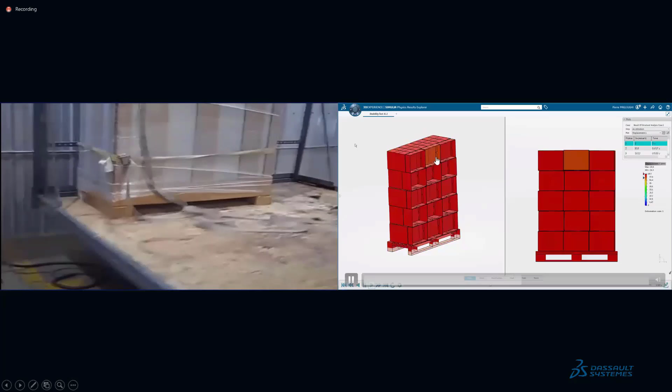And you can see this box in the middle could potentially shake loose, right? So this would be an example where you would probably need to add more wrapping. And that's something we can do, analyze the pallet film wrapping really easily also.

So let's see, also being able to do thermal analysis. This is something you can do with SOLIDWORKS Flow Simulation. You can also do it utilizing the Fluid Dynamics role on the platform. It's a product called Fluid Dynamics Engineer.

The benefit of doing it on the platform is that one of the huge benefits is the ability to use multiple cores and get that linear rate of return when you're running analysis. SOLIDWORKS Flow Simulation, you kind of get diminishing returns after about 6 or 8 cores. You don't with the platform tools.

So we can get a feel for exactly how fluid moves through this. And Omar, if I can interject, I guess one of the big things, I'm a big flow simulation fan. One of the big things I like about flow is the automatic fluid volume recognition. How does Fluid Dynamics Engineer handle that?

Yeah, so it's got some similar functionality to allow you to recognize an internal fluid domain. If it's an external fluid domain, you need to kind of set up the bounds yourself, but it's similar to SOLIDWORKS Flow Simulation. What is different is SOLIDWORKS Flow Simulation uses that partial cell technology to handle the interface between solid and fluid, which is really, really cutting edge, but it does come with some limitations.

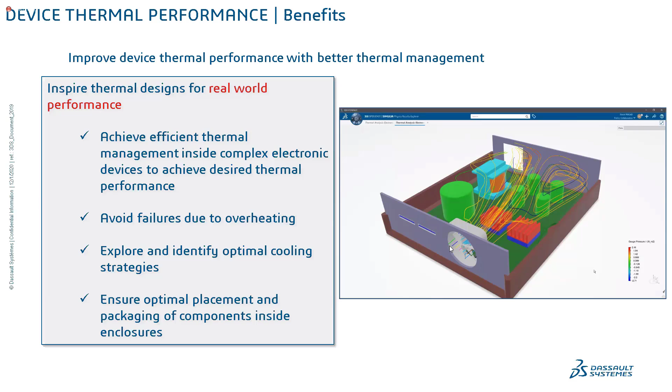So it also uses a Cartesian grid. You're not limited to a Cartesian grid here for your mesh; the mesh is actually on your geometry. So there are benefits to both, but then obviously you can take, like we discussed earlier...

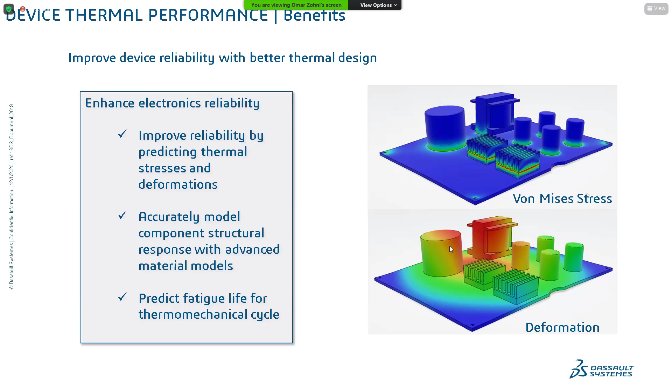So this is an example of taking those thermal results from the flow tool, and seeing what the von Mises stress and deformation would look like. So let's see, let's take a look.

Another really compelling example, and kind of funny timing, Arun, I know we have a call after this to discuss something just like this, but this was actually from last week at the ModSim event that SIMULIAworks threw. You can see the ability to run a drop test and add all that fancy background to keep your bosses happy so that it looks like it's actually happening on the shop floor.

And this also looks like it was animated in the 3D Experience platform. It was, yep. It's using 3D Excite, that creative experience inside of 3D Excite.

We didn't talk about another thing that I think is important to highlight: Simulia has a ton of different products that allow you to solve for lots of things. So this is showing an electromagnetic solution, looking at the electromagnetic energy generated as a result of this phone being used. A handful of years ago, Simulia acquired a product called CST, which allows you to do electromagnetic analysis. I wouldn't be surprised if the next SIMULIAworks products include an electromagnetic solution—it only makes sense to turn on these capabilities for SOLIDWORKS users. But there are also things for system analysis, really complicated durability and fracture and failure analysis, great acoustics modeling, and really powerful flow simulation tools. One specifically uses lattice Boltzmann that I think we're going to be seeing in Fluid Dynamics Engineer or another product really soon.

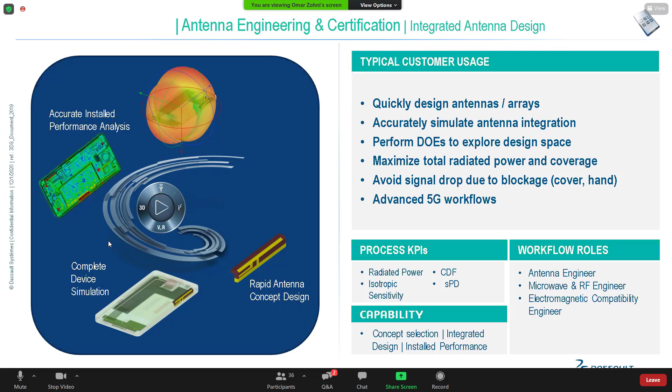So with respect to high tech, if you're interested, you can definitely do electromagnetic simulation. This is more for RF and defense industry, specifically RF analysis. High frequency electromagnetic simulation is something you can do along with electromagnetic interference. Obviously, checking the effect it has on a human is something too—so where the phone is positioned with respect to the human head, and ensuring you're not going to be causing any damage to humans as these things are used, is something you can do with CST.

And then obviously all the structural analyses, right? Whether it's drop testing or thermal analysis or ensuring that the stresses aren't going to be too high, or it's not going to break when it falls. All those types of durability and reliability analyses ensure that your product, when it does come to market, is going to meet the market requirements.

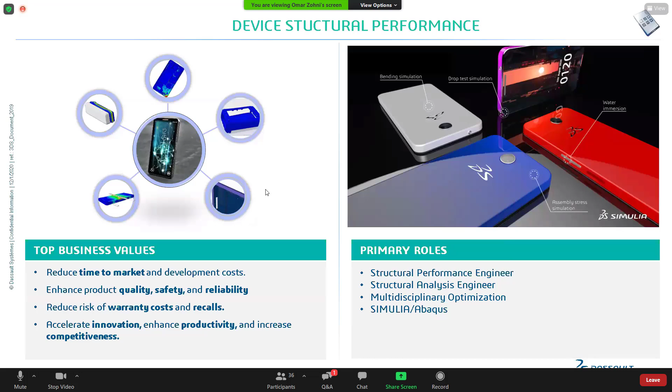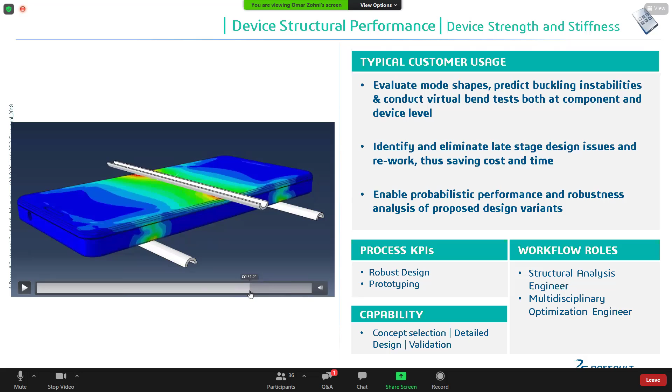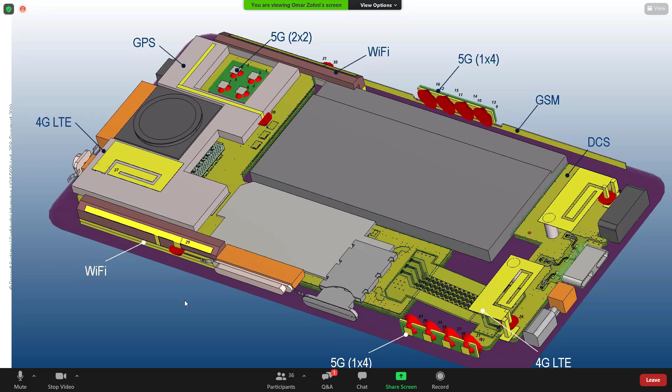Here's a couple more examples. This is a structural performance engineer doing a 3-point bend test on that phone example. Nothing too life-shattering, but we can get a feel for exactly what the displacement is going to be on that phone. Although you're not showing it, all the internal components are properly modeled in there, right? They are, yep—there was a slide a bit earlier that showed the internal components inside this thing, so all of these are included. When you do that 3-point bend test, if you have the interface material between these components and the board, and you know the damage properties of those interface materials, you could actually do that test and see if components were going to pop off, if the interface material was going to fail.

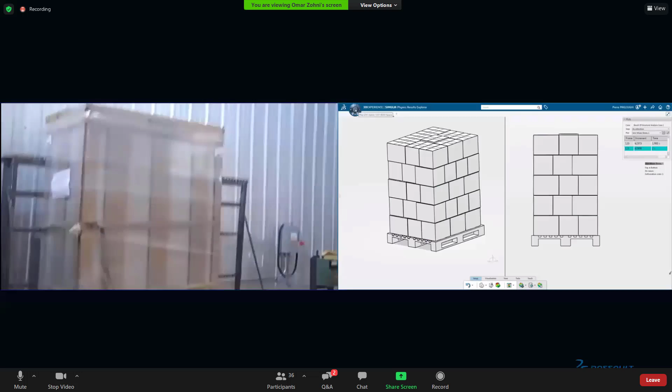Would you be able to go back and show the packaging getting shake tested, that explicit dynamic test you did? Sure. We had a person come in late, but this is basically the example they asked about. While he pops that up, to that question in the Q&A, this would be the highest level FEA product we have on SIMULIAworks platform, called SME, Structural Mechanics Engineer. Omar's showing this video here on the right—this is a packaged component undergoing a shaker table test or earthquake test. As you'll watch the results, that box pops up in the middle. This is factoring in sliding friction—it's not all bonded together like we need in SOLIDWORKS simulation.

Let me—I know we're running out of time, and I don't want to take more of people's time than what we signed up for. So here are some examples of models we've been able to solve in the last few months using these tools. Shivani, you mentioned that bird strike—there's a bird strike analysis, a lot of metal forming. The blade damage is another cool one—provided you have the damage model or appropriate material properties to model the damage of the blade. The bottle crush filled with SPH elements is another cool one.

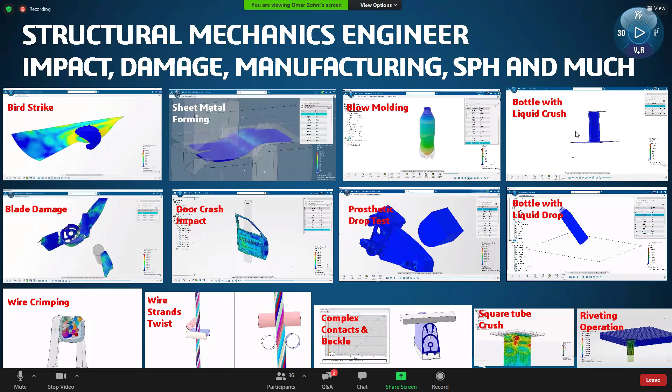We had a second question come in, since people will probably have to start getting out of here—you'll see it at the bottom of the Q&A section. It's about thermodynamic simulation of lithium-ion batteries. Can we do that kind of complex thermal analysis? I'll be honest, I'm not familiar with the type of thermal analysis required for a lithium-ion battery, but we can do thermal analysis. I don't know where the thermal load is coming from with a lithium-ion battery, but I'm going to assume that we can. Tesla is a customer of ours, so.

Joule heating is one of the features in Fluid Dynamics Engineer, right? So you can put in current as a boundary condition if necessary. Yeah, you can do I2R heating, Joule heating, which is technically also possible in Flow. This sounds like it'd be an interesting one. We might just have to talk to Chris one-on-one.

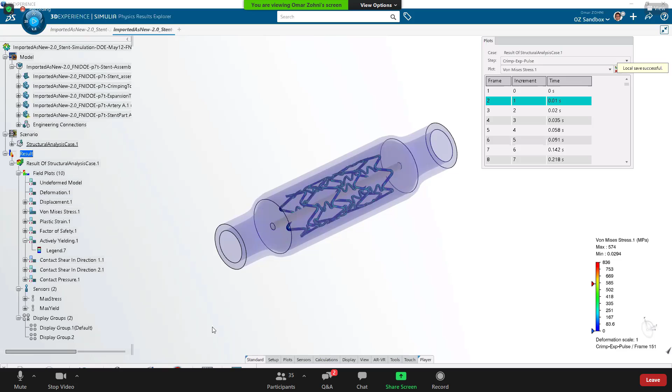Unless... I don't see any other questions coming in. So Chris, if you wanted to unmute yourself, you could, if you wanted to say something. When do you guys have to go for your next call? At least, we have to wrap this up in about 10 minutes. It'll be good. How about you guys?

We've had this question repeat a few times, and Arun answered it in the Q&A, but people seem concerned that SOLIDWORKS simulation isn't going to continue updating. Do you mind just saying it one more time, Omar, that SOLIDWORKS Sim isn't going anywhere? Sure. Look, to the best of my knowledge, it's not. It's a flagship product, it generates a lot of revenue. There are a ton of users using the desktop simulation tools. So it would be extremely short-sighted, at least in my opinion, for Dassault to eliminate that tool. And we haven't been told that. We've been told that product will continue to be developed. There will be bug fixes. When it makes sense, there'll be a transfer of capabilities from Simulia into the desktop product. So I don't see it going away.

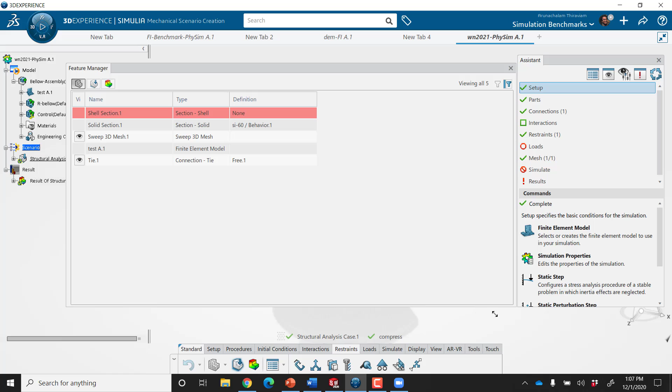So this is kind of what you're seeing. Everything that you're setting up is popping up here in this feature manager tree. But if you miss something, you're going to get a warning. It's going to highlight red like this, and you hover over it, and it tells you what's wrong. Yep, you go fix it, right-click edit. If that's not what you were asking, please write another question here in the Q&A.

Yep, and we have plenty of videos walking you through soup to nuts how to set up a part and how to set up an assembly. We have a dedicated channel on our website for 3DEXPERIENCE tutorials, so you can definitely take a look at that. And just to add to Shivani's point, there are 3 modes of feedback. One, we have the spec tree that gives you all of these warnings with yellow warning marks. Another one, the feature manager, is a great tool - I'm pretty sure all of us on the call use this pretty heavily. And the third one is the assistant panel. Anytime you feel like you're lost in the analysis, and don't know if a certain step has been completed, watch out for the green check marks.